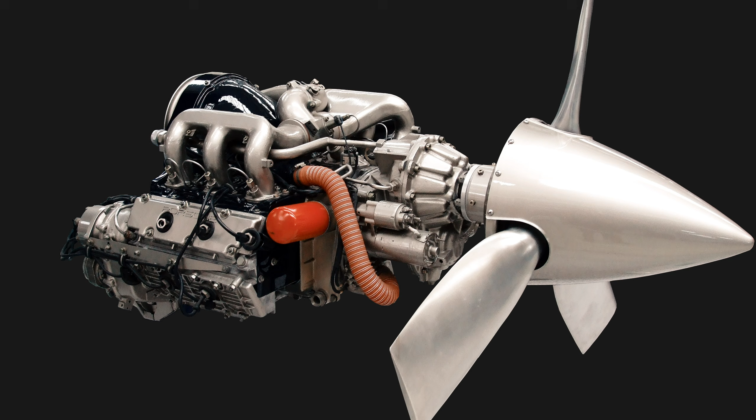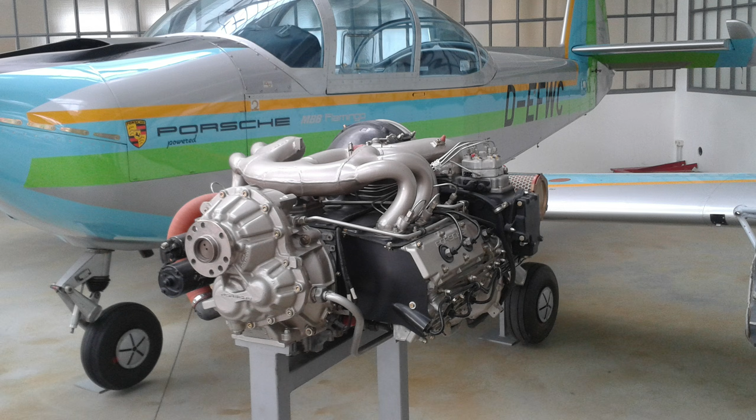Porsche designed and built light aircraft engines in the 1980s, which powered, among others, the Mooney M20L. Porsche's PFM 3200 engine was hyped up as a modern replacement for aging engine designs, but only about 80 of these engines were delivered before production ceased. So what happened? Was it a dismal failure of an engine, or were there other factors at play?

I won't cover Porsche's full history, I'll focus on the aviation side to remain relevant to the channel. The PFM 3200 that powered the Mooney M20L, the engine I'm discussing in this video, was not actually the company's first foray into aviation.

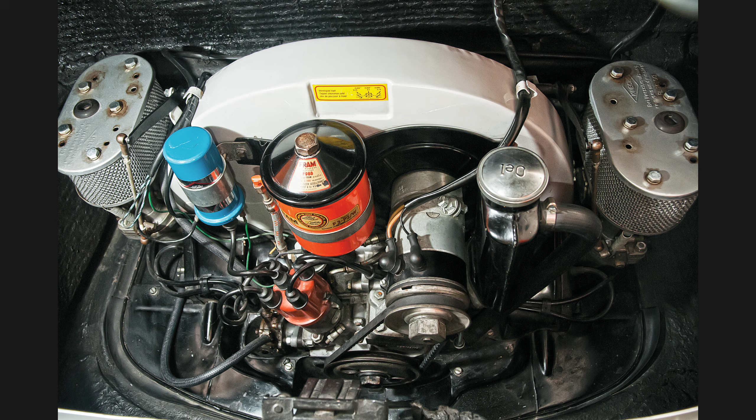For that, we have to go back to 1955, the year in which the post-World War II ban on aircraft design and manufacturing in Germany was fully lifted. German aviators wanted to get back in the air, but the country's aviation engine industry had been decimated, and there were limited options for locally produced four-stroke aircraft engines suitable for light aircraft. They realized the Porsche 356's engine, an air-cooled Boxer 4, was a good candidate to be adapted for aircraft use.

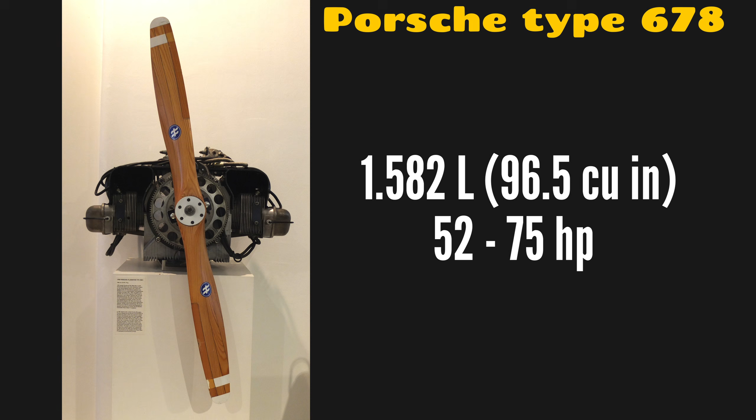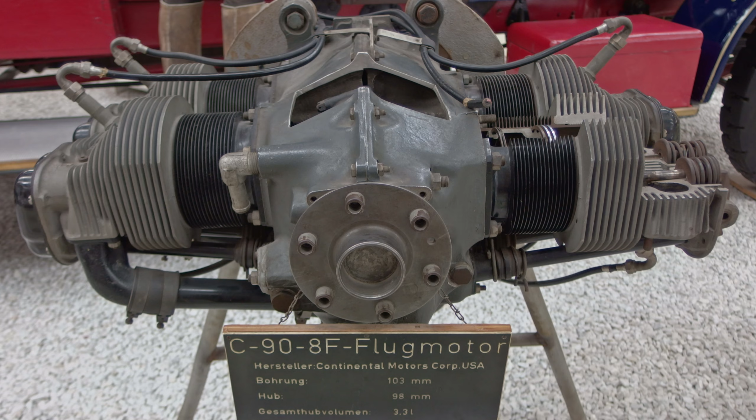Although the engine wasn't certified, Porsche provided this engine, the 678, to buyers in an aviation-ready configuration. The 1.6-litre engine produced between 52 and 75 horsepower, depending on the variant, and was a popular option for home-built aircraft. But it also powered Germany's first post-war production aircraft prototype, the Bolkow Klemm Elster. However, the production variants of the Elster used the more powerful 95 horsepower Continental C90. The 678 engine was built until 1963.

Porsche cars started becoming really popular internationally from around the late 1960s, and their racing prowess got better and better, regularly winning endurance races. In 1970, Porsche got their first 24 Hours of Le Mans overall win. By 1981, they had been triumphant on 5 more occasions.

Porsche was riding high and decided to take their success even higher, in a manner of speaking, by re-entering the aviation market. After all, general aviation had been steadily growing since World War II, and Porsche saw an opportunity. They started development of a modern aviation engine in 1981.

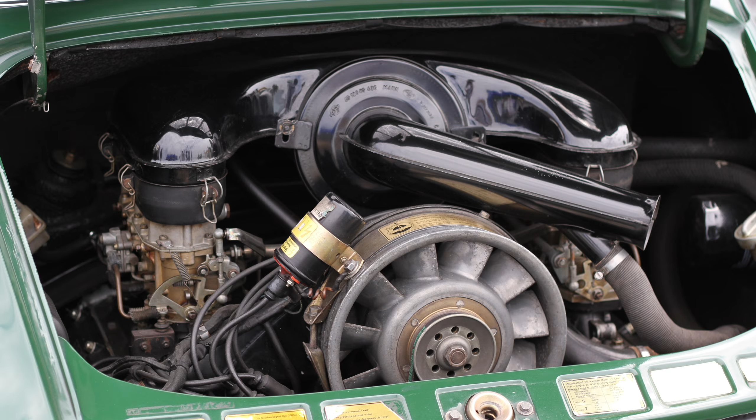Their reasoning for entering the aviation market again was actually fairly sound in theory. They had decades of experience manufacturing reliable performance engines. They also noticed that aviation engines hadn't changed from basic designs dating to the 1940s, and that there was room for a refined modern aero engine with lower emissions, lower noise, easier pilot operation, and better efficiency, which would be welcome with the ongoing oil crisis.

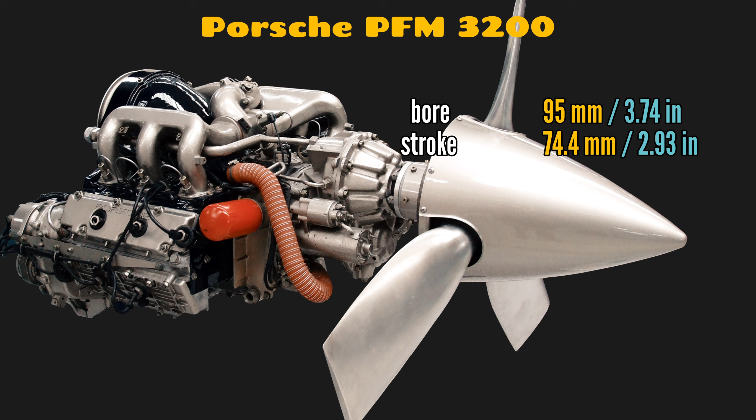They based the design on their air-cooled Boxer 6 architecture, but the PFM was developed specifically as an aviation engine, with almost no parts being shared with their new 3.2-litre 911 engine, which was developed in parallel and would power 911s from 1984. Though the PFM 3200 did have the same bore of 95mm and stroke of 74.4mm for an identical displacement of 3,164 cubic centimeters. Its maximum power of 217 horsepower was produced at 5,300 RPM, which meant a propeller speed reduction unit was required.

The propeller speed was reduced by a ratio of 0.442 to 1, for a propeller speed of 2,340 RPM, which would lower propeller noise compared to direct drive engines spinning propellers up to 2,700 RPM. Brake-specific fuel consumption was 260 grams per kilowatt hour.

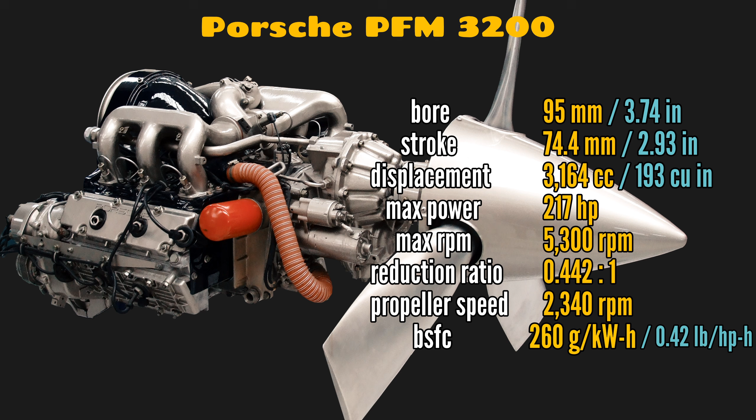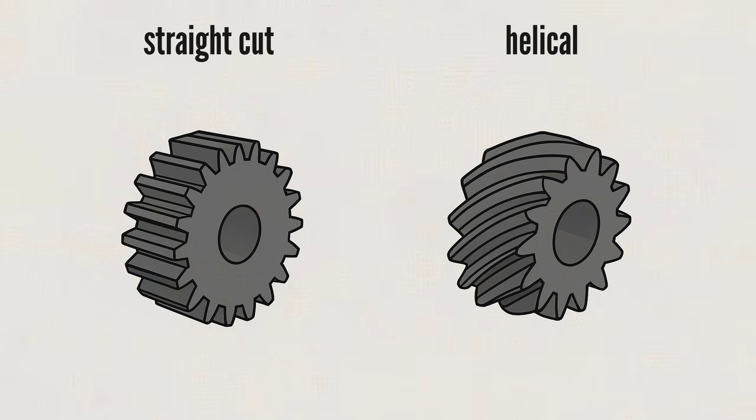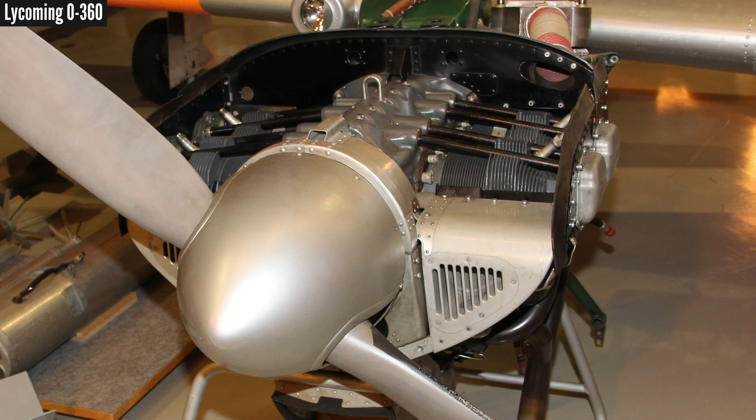The gearbox casing, shaft and gears were designed for a 10,000-hour life and rated for 300 horsepower. It made use of helical gears to lower noise, and the gearbox was designed to accommodate the hydraulic constant speed propeller system. While the engine was air-cooled, it can easily be mistaken for a liquid-cooled engine, as the usual cylinder cooling fins visible on conventional air-cooled engines aren't visible here.

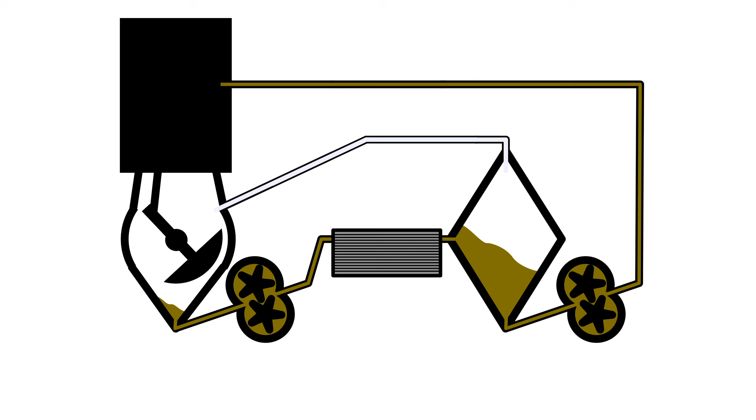This is partly because the engine was just as much oil-cooled as air-cooled. While all engines get some cooling from oil, the PFM relied heavily on its large volume oil flow for cooling, and the flow was controlled by a thermostat which was very sophisticated for the time. It was a dry sump system and oil was cooled after being scavenged, going through an oil cooler on its way back to the external oil tank.

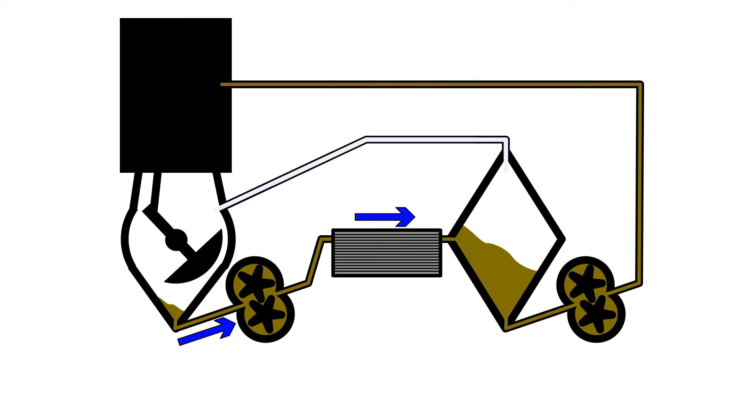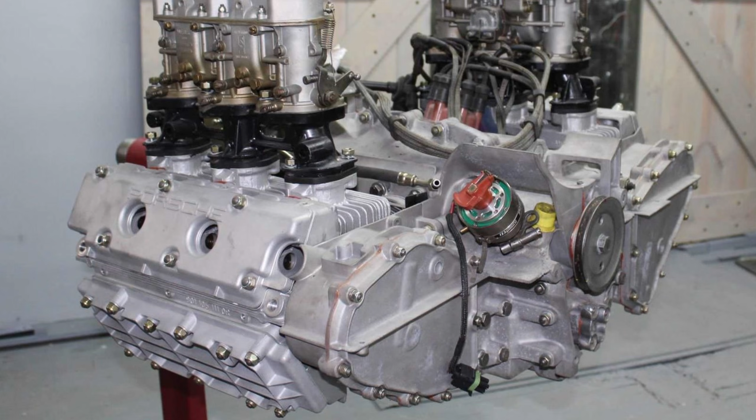But that doesn't mean it didn't cool with air too. In fact, it made use of forced air cooling, featuring a belt-driven fan placed at the rear of the engine. The fan blows air forward through a ducting system over the cylinders. The cylinders did have cooling fins, though they are not visible without removing some of the covering and ducts. In theory, this forced air cooling had several advantages. One is that cylinder head temperatures were independent of airspeed.

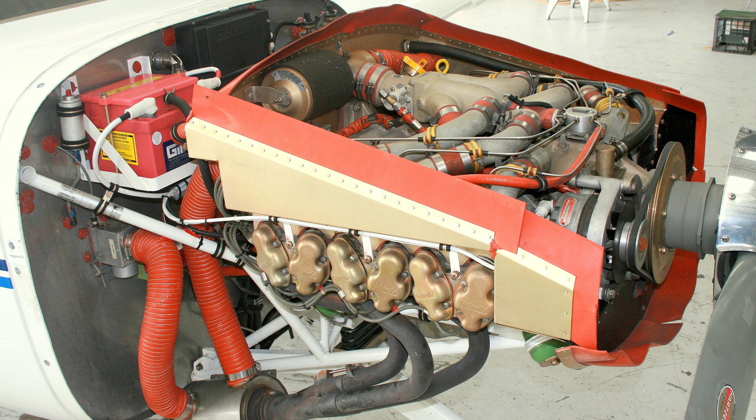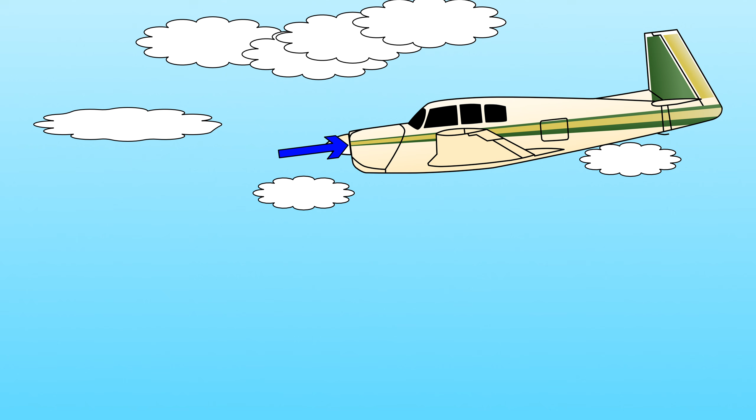For example, a slow climb at full power gets full air cooling since the fan is belt driven by the crankshaft and running at full speed, unlike normal air-cooled engines which get suboptimal cooling in a slow climb. In the same vein, there was no shock cooling when descending, as closing the throttle for descent reduces the amount of cooling from the fan. This is in contrast to conventional engines which get full airflow with the engine not creating much heat.

Additionally, no ram air was needed and no cowl flaps were needed. The system did come at a cost though, which I'll get to momentarily.

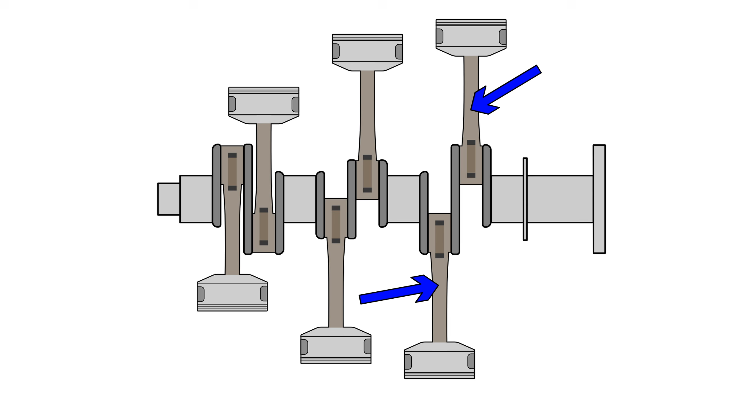The engine was of course a Boxer 6 like the 911 engine. This means opposing pistons' connecting rods each have their own crankpin rotationally offset by 180 degrees. This is specifically what makes it a Boxer, with opposing pistons mirroring each other, moving outward together and inward together. As a result, the Boxer 6 has almost perfect balance. Don't believe videos or illustrations showing opposing pistons sharing a crankpin like a V engine, with pistons moving together. That's incorrect.

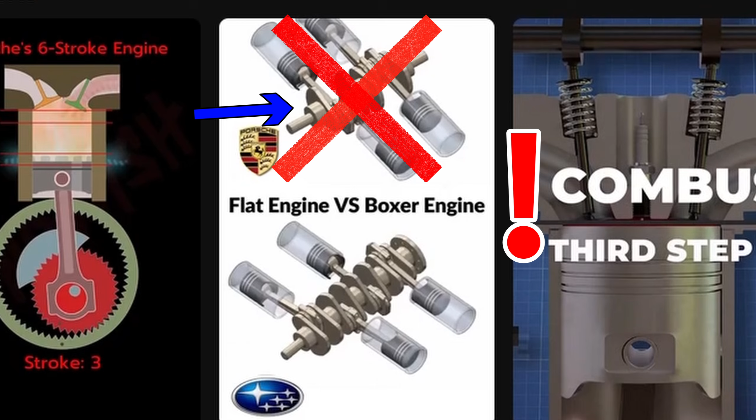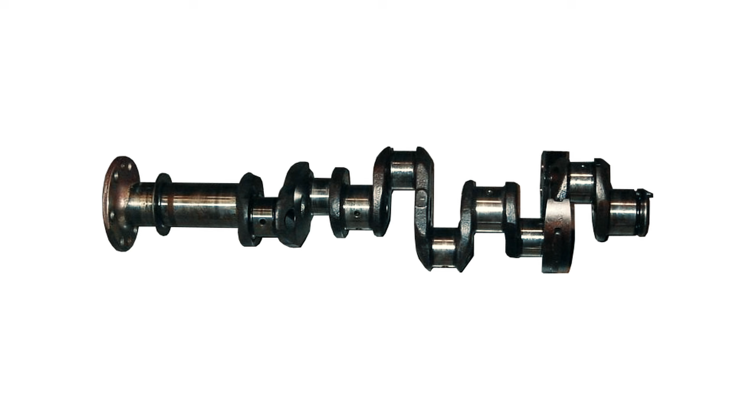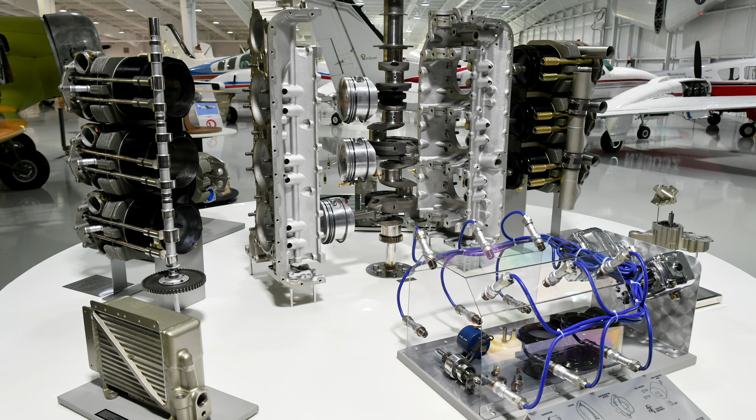Porsche employed a torsional damper at the rear of the crankshaft to reduce torsional vibration. That's the force that attempts to twist the crankshaft along its length, and the length of the crankshaft is one of the factors that determines if one is needed. I've seen this specifically listed as a disadvantage of the Porsche engine, but the competing six-cylinder engines also have torsional dampers, usually the pendulum type. In fact, even some high-power, large displacement four-cylinder Boxers have a torsional damper.

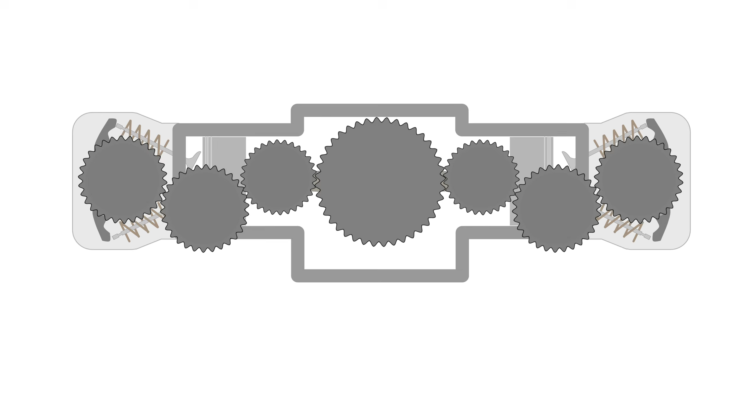The PFM featured an overhead camshaft for each bank of cylinders, with 2 valves per cylinder. Unlike the 911 engine, which used a cam chain, the PFM's camshafts were gear-driven. It used the Bosch K-Jetronic automatic altitude compensating fuel injection system with dual electronic ignition systems for redundancy.

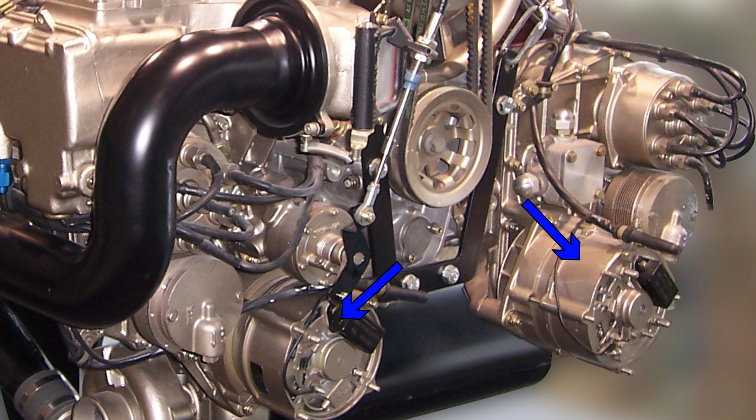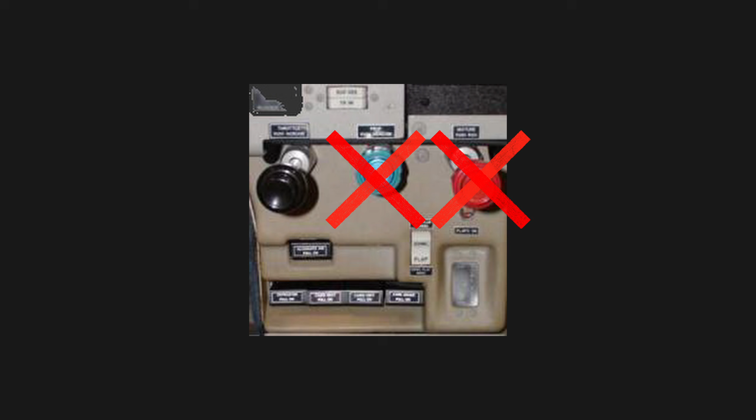In fact, most systems were dual, having 2 alternators and even 2 batteries. Another system doubled up on was the engine control system. This also enabled single lever operation, so no separate mixture control and no separate propeller pitch control. Everything happened automatically based on the throttle setting. Whether you're for it or against it, one thing is for certain: it lightens the workload for the pilot.

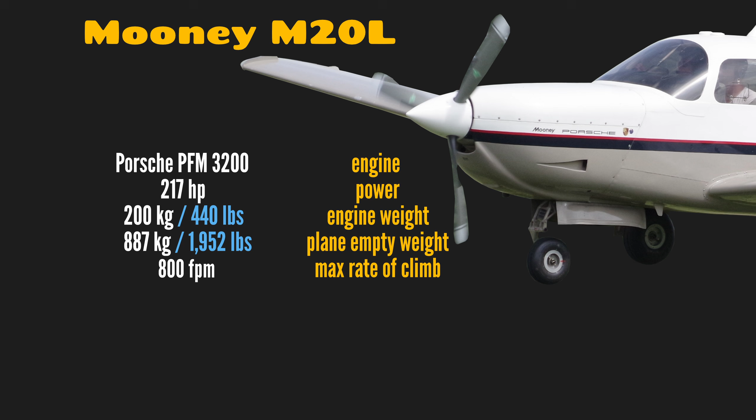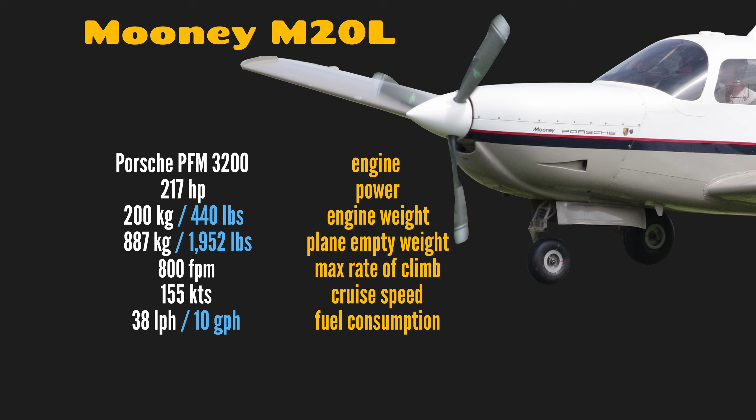And while these numbers are supposed to be at max all-up weight, this number was not achievable in the M20L. Some reported max rate of climb as low as 640 feet per minute when loaded. I've also seen numbers around 800 feet per minute reported at less than maximum all-up weight, and it achieved a cruise speed of 155 knots, consuming 38 liters per hour at about 75% power. Service ceiling was 19,300 feet.

The M20K was outfitted with the turbocharged 6-cylinder Continental TSIO 360, which had a maximum power output of 210 horsepower and weighed 180 kilograms. That gave the M20K an empty weight of 818 kilograms.

Rate of climb was claimed to be 1,080 feet per minute, and most pilot reports indicate this is actually achievable when heavily loaded. It cruised about 165 knots. It will cruise a bit faster at higher altitudes, but this number is for below 12,000 feet, where the non-turbocharged J and L variants achieve their best cruise speeds, for the sake of comparison.

Service ceiling was 24,000 feet, possible since it's a turbocharged engine that maintains full power up to much higher altitudes than naturally aspirated engines. Fuel consumption was 48 liters per hour at 75% power.

The M20K clearly outperformed the M20L in everything but fuel consumption. But what about the older J variant? Surely the Porsche engine will compete better against the 4-cylinder Lycoming.

The fuel-injected Lycoming put out 200 horsepower, weighed 150 kilograms, and gave the plane an empty weight of 760 kilograms. Maximum rate of climb was claimed to be 1,030 feet per minute, and observed averages all exceeded 800 feet per minute. It had a service ceiling of 18,800 feet.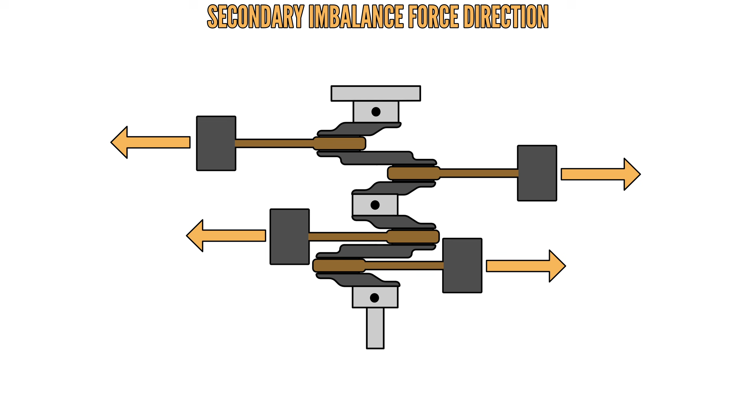Perhaps the M20L's only advantages were lower noise, both cabin and external, lower pilot workload, and slightly better fuel consumption. The Porsche engine was also notably smoother running than the IO360, as boxer engines have a rocking couple caused by a secondary imbalance, which I won't get into in this video.

So what was going on? The Porsche engine has more power, so why does this not translate into real-world performance? And no, the higher RPM and gearbox were not the problem here. The lower rate of climb usually observed was mostly due to its higher weight.

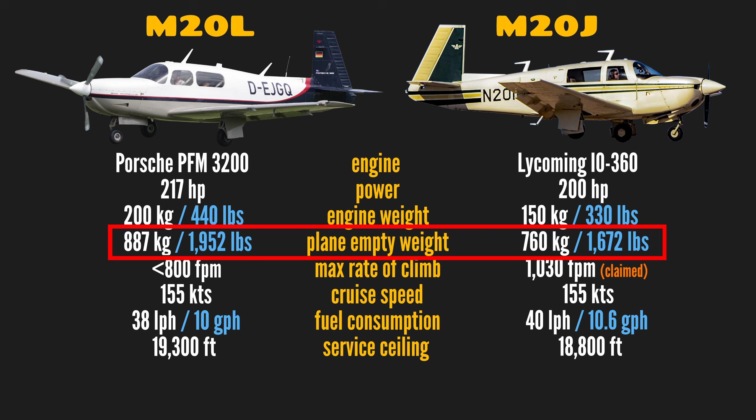The M20L weighs about 70 kilograms more than the K variant and 130 kilograms more than the older J, mostly due to the higher weight of the Porsche engine and accessories. The heavier engine is due to various factors, including the dual systems like dual ignition, alternators, and batteries.

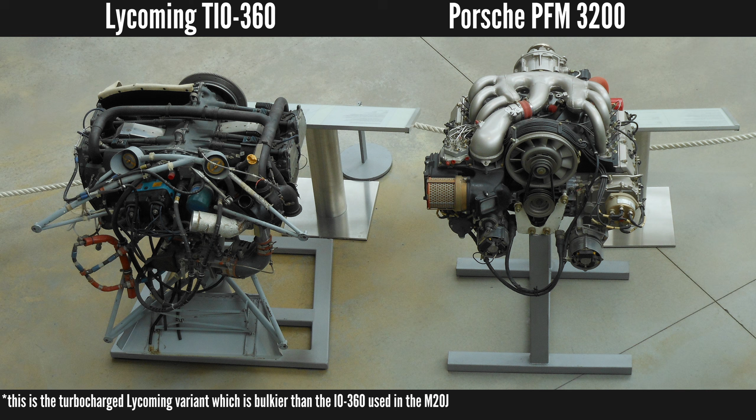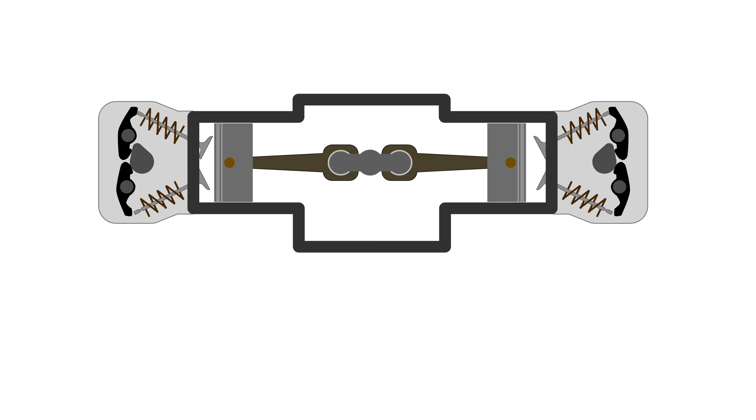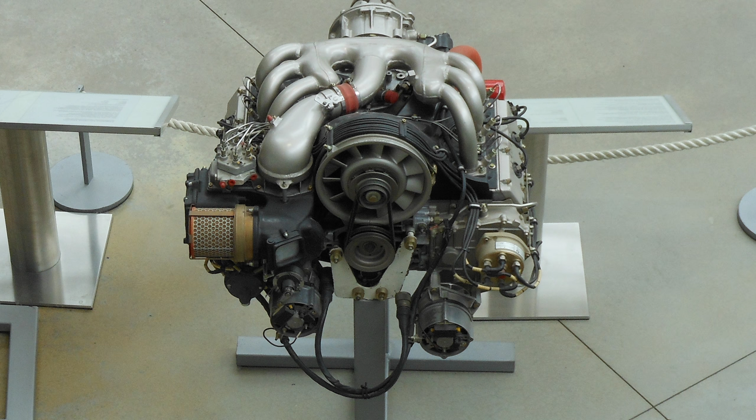Despite its smaller displacement of 3.2 liters, it's physically a massive engine, matching and exceeding most dimensions of its 5.9 liter or 360 cubic inch competitors. This is in part thanks to its overhead cams, which substantially widens the engine. It's also quite a bit more complex, doubling up on camshafts, for example, and it has that propeller speed reduction unit, which does contribute to an increase in weight, as well as the forced air cooling and ducting system.

But what about cruise speed? Unfortunately, the mentioned cooling system with shrouded fan and ducting creates a lot of cooling drag. Even though it's an enclosed system, there's a penalty.

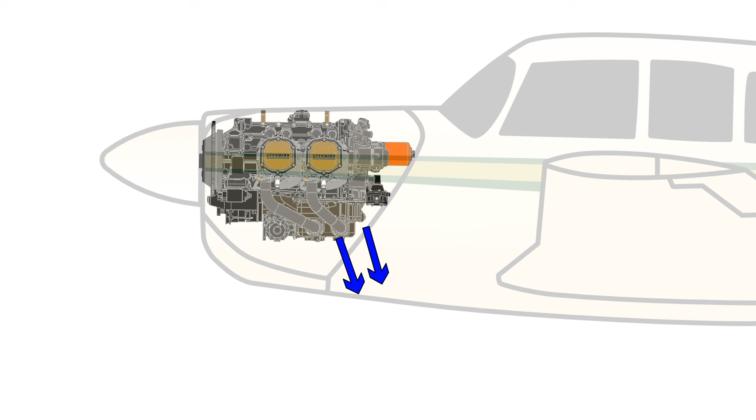With a conventional air-cooled engine, air would enter the cowl, move around the engine and cylinders, flow downward and exit at the bottom rear of the cowl. With the PFM engine, air would go into the admittedly small inlet, but then move back, turn almost 180 degrees to go through the fan and forward over the cylinders before it would exit. That creates massive drag at high speed. Some estimates are that this alone accounted for at least a 12-knot penalty in cruise speed.

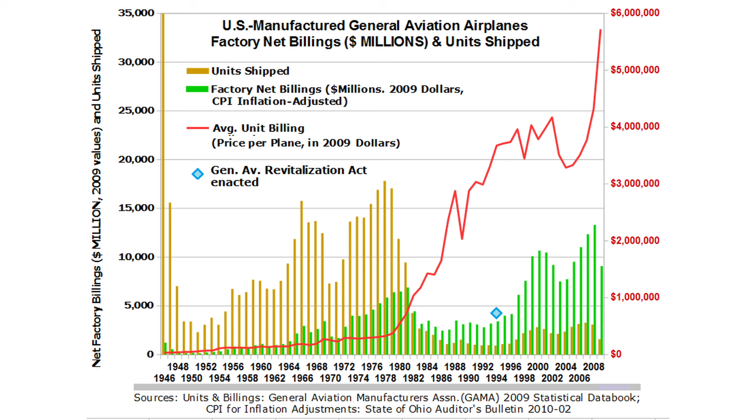So were these factors the sole reason for only 41 M20Ls being built before production ceased? Here I need to provide some wider context. General aviation went through a massive slump in the 1980s, with sales and consequently manufacturing numbers dropping significantly.

The oil crisis couldn't have helped, though the primary reason was the increasing litigious culture, with the average liability cost in 1988 being about $100,000 per plane. This meant that Porsche re-entered the aviation market at the worst possible time, especially for a company trying to establish itself in a market that was difficult even before the financial slump.

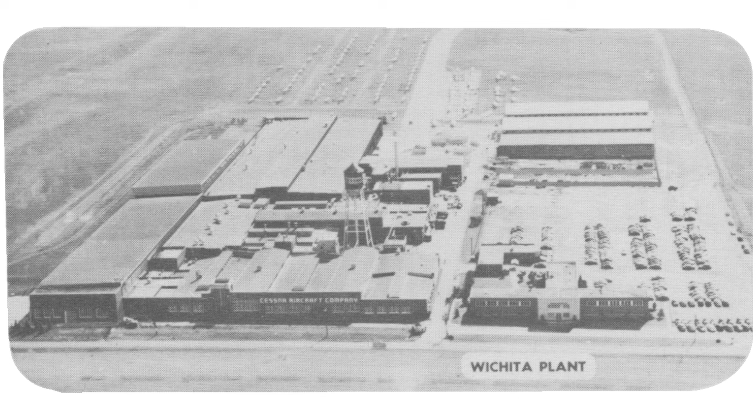To bring the extent of the market downturn into perspective, even light aircraft giants like Piper and Cessna suffered heavily by the mid-1980s. Cessna stopped production of light piston singles in 1986, and Piper eventually filed for bankruptcy by 1991. Piper and Cessna started production again in 1995 and 1996 respectively, but only after the passing of the General Aviation Revitalization Act, which limited manufacturer liability.

But the PFM program was long dead by then. So am I saying this is the reason for the PFM 3200's failure? It played a massive role, but we can't ignore issues with the engine itself.

Aside from the PFM engine Mooney being less performant in most metrics, the appeal of flying behind a Porsche engine was further reduced by the M20L's price tag. In 1988, this was about $63,000 more than the M20J, and about $13,000 more than a fully equipped M20K.

The Porsche engine alone cost around double that of the M20K's Continental. Porsche's argument was that the additional cost would be recovered in just 1,200 hours of flying due to fuel savings. Some lazy math on my part shows that for the M20L compared to the M20J, to recover that extra $63,000 with a fuel saving of only 2 liters per hour, you would need to fly roughly 96,000 hours to make back that money, which is not realistically possible.

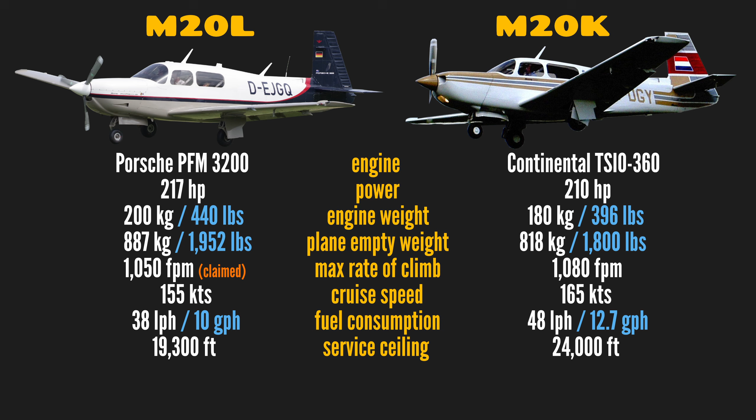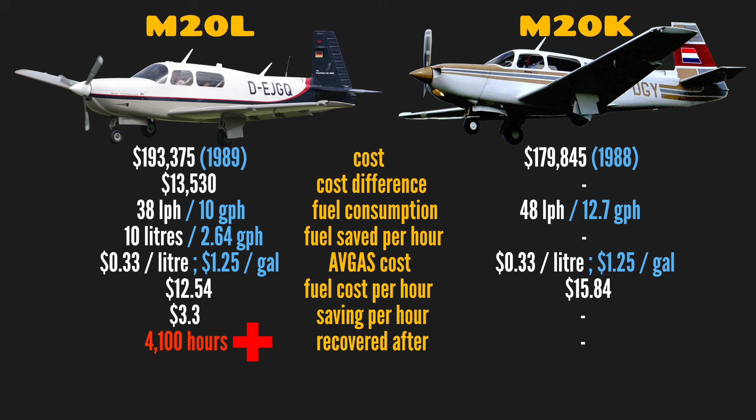And we didn't even take into account that the M20K cruises about 10 knots faster at the fuel burn number we used. That means it spends fewer hours flying to reach any destination than the slower M20L. So if working on cost per mile instead of cost per hour, it would be even more than 4,100 hours to recover that additional $13,000. It's possible I made a mistake with my math, or maybe Porsche just used different airplane cost and fuel burn numbers than I did. But it just doesn't seem achievable at all to recover that additional cost.

Also note that I didn't consider maintenance costs in my calculations, which I can't imagine being cheaper on the Porsche, being a much more complex engine. Not to mention, mechanics needed special training, so the support network was much smaller compared to Continental and Lycoming.

I did consider the possibility that Porsche used the cost of cheaper MOGAS instead of avgas in their calculations. While the PFM was initially designed to run on both avgas and MOGAS, compression ratio was later increased on the certified version powering the Mooney, likely when Porsche became aware of the lacking performance, which meant that MOGAS, which is lower octane, couldn't be run anymore.

Porsche was confident it could eventually increase TBO to 3,000 hours, and that would have added some credibility to these claims. But we never got to that point.

Porsche did have plans to make the engine more attractive, where emissions and noise were already becoming a problem in Europe. The lower noise of the PFM engine was a selling point here, and Porsche also had plans to fit a catalytic converter to lower emissions.

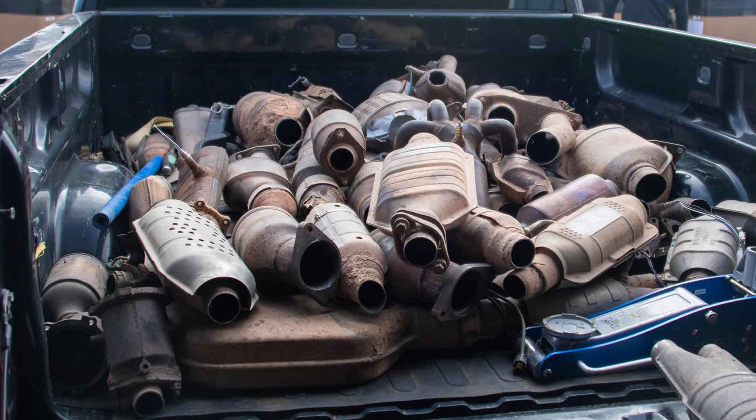But for that to come to fruition, the engine would first have needed to be commercially successful. With the $75 million it cost Porsche to design and deliver about 80 engine units, the engine and the M20L needed to basically fly off the shelves, so to speak, to recover that cost. Of course, they didn't, and in late 1989 the program was cancelled.

Porsche did offer limited support for the engines up to 2005. My guess is, had there not been a general aviation recession, PFM production volumes could have roughly doubled, but production lines would ultimately still have closed, perhaps a year or two later. Had the engine not been as expensive, the appeal of flying behind a Porsche engine, even with less performance than other options, may have saved the program.

Or perhaps if it had outperformed other variants, many would have been willing to part with more money for an M20L. But neither of those things happened. Aside from its cost, lack of performance and the general aviation downturn, another big reason for failure to be adopted in greater numbers was the reduction gearbox.

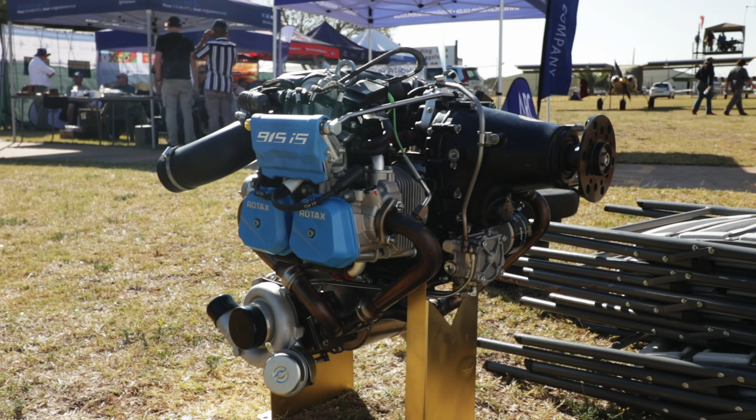This seems like a direct contradiction to what I said earlier. Let me explain. The problem wasn't the gearbox itself. It was well engineered, and we know that geared engines can match and in some cases exceed the reliability of direct drive engines. Rotax has proven this, backed up by statistics.

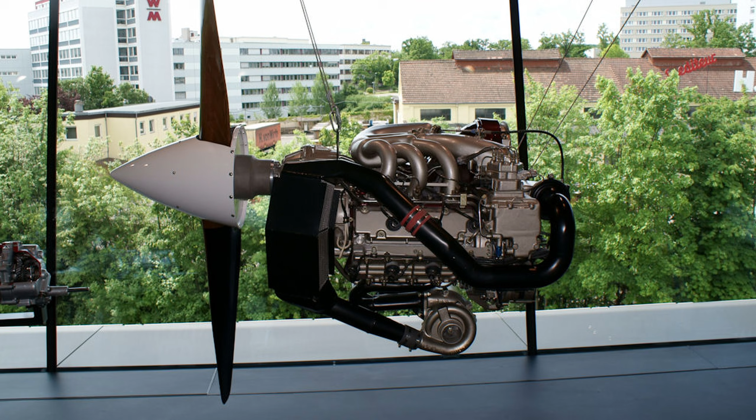The problem was the aviation community's cultural distrust of geared engines after some historical failures. According to what I could find online, of the 41 Mooney M20Ls that were produced, only a handful remain still sporting its Porsche engine. There are still a few more around in other aircraft as well as in museums. You can see an example for yourself in the Porsche Museum in Stuttgart, the Technik Museum in Speyer, and the only PFM version of the MBB 223 Flamingo is on display at the Deutsches Museum Luftfahrt Schleissheim.